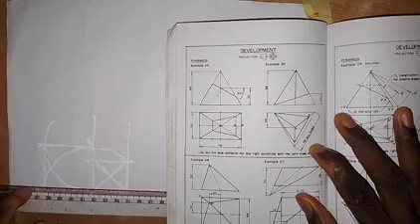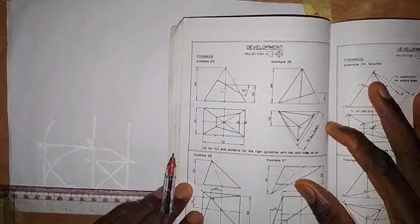This problem has to do with a triangular pyramid, the surface development of a triangular pyramid. This pyramid is a truncated one, in the sense that it's cut, this part is cut off, and these views are given in first angle orthographic projection. It means that this is the front elevation and this is the plan, as you can see here.

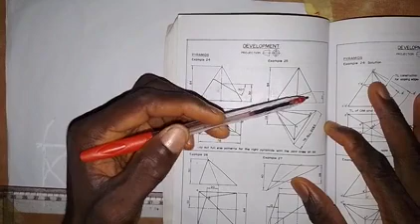Let's talk about the dimensions on these views. For the front elevation, the distance from here to the apex is 64, and the distance from this base to this point where the cutting starts down here is 20 millimeters.

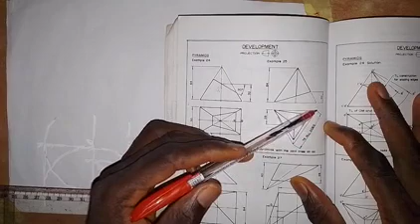Coming to the plan, we have that the length of side of the triangular base of the pyramid is 76 millimeters, that is all sides. So distance from here to here is 76, from here to here is 76, and from here to here is 76. Then the distance between this center point from this horizontal line is 28 millimeters.

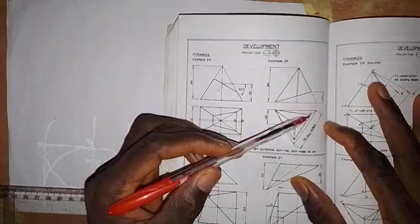And then the seam, so where we are to open from, is this AA that we have here, is a joint line, that is the seam.

So we are going to make use of these dimensions to produce the front elevation and also the plan. Then we go on and produce the surface development of this triangular pyramid. So let us start. The first thing that we are going to do is construct the plan.

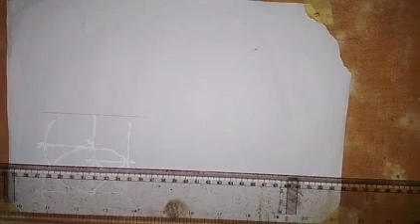I'm going to construct the plan, and to do that, I first draw a horizontal line around here. Then, drawing this horizontal line, I'm going to take a measurement. I'm going to draw a vertical line first, around this part here.

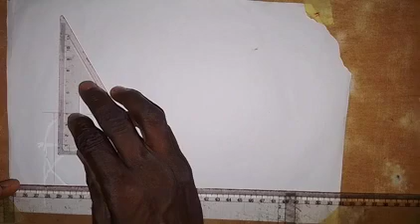Drawing this vertical line down, I will take a measurement of 28 millimeters from this point on the line. So this is 28 millimeters here.

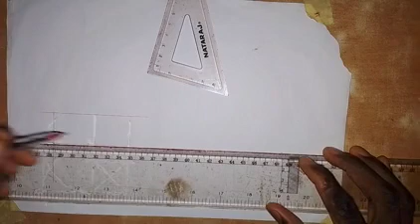With this 28 millimeters, I have to be checking the work. So I'm going to draw a horizontal line like this. Then, with this horizontal line that I've drawn...

The next thing I'm going to do is take a measurement of 76 millimeters on this line, 76 millimeters on this line, and 76 millimeters on this line. This is 76 millimeters, 76 millimeters, and half of 76 is 38.

That's 38 millimeters. This is where we have 38 millimeters.

So I'm going to draw a vertical line here, down. It's really a technical work, so we need to take our time to analyze it. We draw a vertical line down here.

Then I'm going to connect this point. This point that we have here is point A. So we have point A at this point.

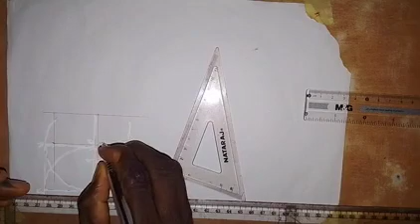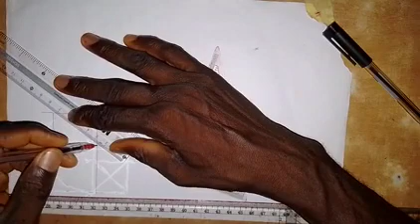So I'm going to connect this point together with this point. We connect these 2 points together like this. So this line that I drew is the line that we have here.

So this is the line, this vertical line that we have here, that is the line that we have there. So that's the vertical line. Then we have gotten this line from here to here, from this point A to this end.

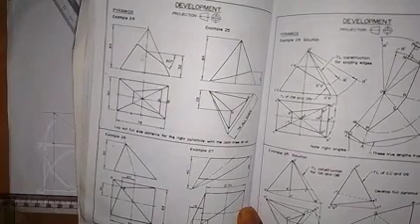So the next thing we are going to get, looking at what we have here - I believe you know that this shape that we have down here is an equilateral triangle. All sides are equal, as we are told that 76 all sides.

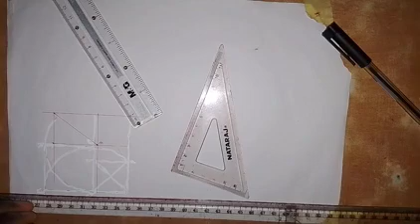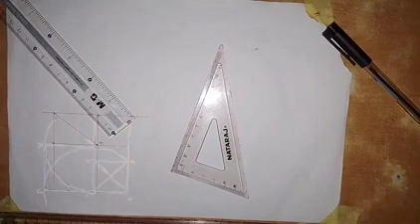So it's an equilateral triangle, which means from this point, if I take a measurement... we have taken 76 from here to here, 76 millimeters from here to here. So that is one of the sides.

So the other side, this is what I'm going to do. That means I need to make use of my set square, my compass. So I will take a measurement of 76 millimeters from here.

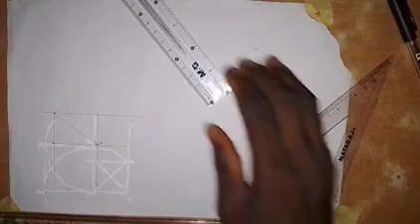76 millimeters from here, then I will put at this point, and then I will make an arc on this line. So the distance from this point to this point will be 76 if you take the measurement. So this is it.

Okay, so as we have it here, this is 76 millimeters. If you look at it well, it's 76 millimeters. So if I drop from here to here, I have that 76 millimeters. Then if I join from this point to this point, I will have that same 76 millimeters as given.

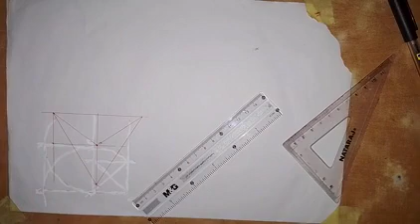So I will now join this point, connecting this point together with this point like this. But with what we have here, we are not done. We have not drawn the plan of the truncated triangular pyramid, because a part of it is truncated, which we need to show in the plan.

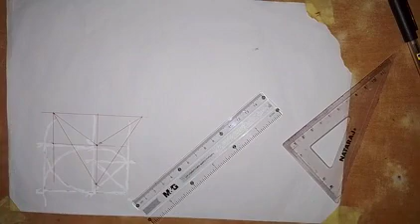So we are going to work that out right now. What we need to do now is go and produce the front elevation of the triangular pyramid.

So what I'm going to do here is extend this vertical line, taking it up here. Then I move up a little bit and draw a horizontal line. From this point, I'm going to draw a vertical line to meet this line, and here also I will draw a vertical line to meet this line.

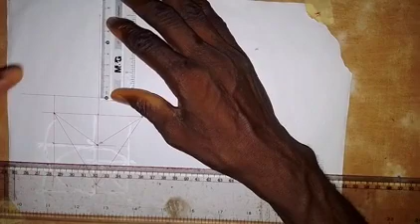Then I will take a measurement of 64 millimeters, which is the height of the triangular pyramid. So this is 64 millimeters, which means I will now connect this point together with the apex, and also connect this other point together with the apex like this.

Okay, so the next thing we are going to do is take the measurement of the truncated part, which is 20 millimeters from the base here. So I will take a measurement of 20 millimeters on this line. This is 20 millimeters.

So I need to locate this point on this slant side here, so I'll just mark it here like this. Then as we have in the drawing, this point is connected to this point like this. So this part is cut off, so we make it a thick line at once like this.

So now, this is a corner, which means this line should be drawn with a thick line. And also this line should be drawn with a thick line, so we make this a thick line. This is also a corner, so we need to make this a thick line too.

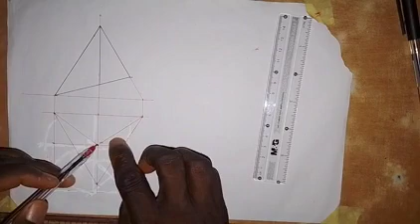So when this part is cut off, it means this line will be shortened, and also this line will be shortened aside this one. This one is just complete because the cutting plane only cuts this part off, so it will only affect the distance along this line, and also the one along this line based on what we have here.

But what I'm going to do is label it according to the way it's labeled in the drawing. So this point is O1, this is A1, this point is S1, this point is C1, this point is B1, and this point is R1, as we have here.

So now let's get this part that is cut off, on this line. By the time I set my set square at this point, if I draw a vertical line down here, it meets this point. So this point that we have here, I call point R2.

And this point that we have here, I'm going to call it point O2, that is this point here. And also this point is point A2, and then we need to locate point S and point C. So this is point C2, while this point is point B2.

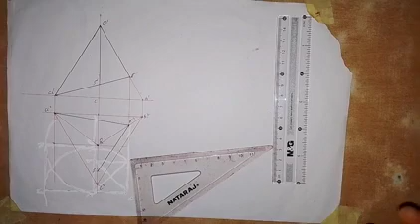If it is not truncated, but since it is truncated, we have to cut off the part that is cut off in the front elevation. So that's what I'm doing now. Also, I'm going to connect this point.

S2 A2 will be connected together like this. So then these lines, these are the edges that we have left for this particular truncated triangular pyramid. We make this line a thick line, and also this line from here to here a thick line.

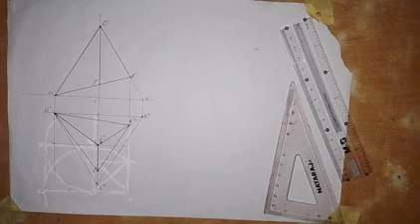So now, what we have left is to go on and produce the surface development. But before we do that, we need to find the true length, because these sides have been shortened, so we need to find the true length. That's what we are going to do next.

So now, to find the true length, we are going to find it for two parts here: the true length of OA and OB, and also the true length of OC. Just look at how I'm going to do it.

The first thing I'm going to do is extend this line. I don't know how long it should be, but I'll just extend it like this. Then, coming to the center here, I will also extend this line. Now I will take my compass and put it at point O here, and extend it to B.

Look at this horizontal line, it contains both A2 and B2, so I can only make use of one of them. If I put the midpoint of my compass at point O2 here and extend to B2, I need to turn it down like this. Wherever it meets this horizontal line, I'm going to draw a vertical line up to meet this line.

So then I'm going to connect this point here with point O1 here, like this. So this true length that we have here is the true length for OA and OB.

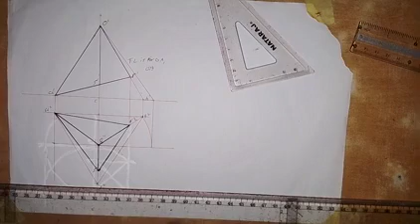Then to get that of OC, I will still put the pinpoint of my compass along this line and extend it to point C. So you can see that to draw the true length and get this point OC, I have to compress this compass, meaning the distance from here to here is not the same as the distance from here to here. So that is what we are doing.

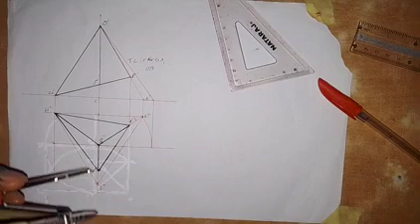By the time I extend it to this point here, that is point C2. So I will draw an arc like this, and it made this point. From this point now, I'm going to draw a vertical line, and I think it made this point, this line OS at this point.

Sorry, so it made this line OB, which means that this is the true length of OC. So this is the true length of OC, and it's also the same as the true length of OB. So let's take note of that.

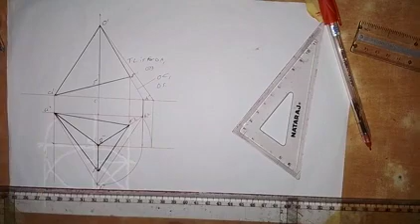Okay, so now the next thing that we are going to do is to carry out the surface development using the true length. All right, let's look at how the surface development will go.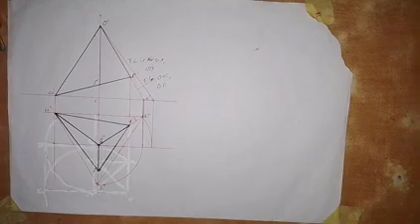At this point, I'm going to draw a horizontal line. From this point, I will draw a horizontal line like this. Okay, so this point is going to be my point O for the surface development.

So now I will take my compass and take the longest true length, which is this line, the true length of OA and OB. So I put the point of my compass here at point O, then I'm going to draw an arc like this. I pray that this will be enough.

I'm not sure if it will be enough for the work that I want to do, but let me see how I'm going to get it done. So now, what we need to do is take this point, which is point B. So what's next is to locate point R, because we are opening it.

This is where we have the seam, so we are cutting it from here. I take the distance to locate this point R here. I will take this distance, then put it at point O, then I will make an arc here. So this point is point R.

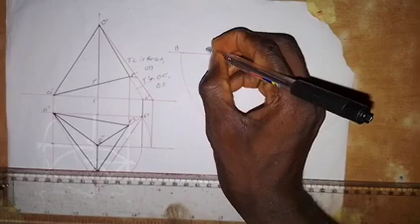So this is point R. So the next thing that I'm going to do is to locate point A. So how can I do that?

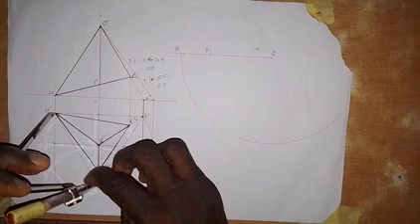What I need to do is take a measurement of this, 76 millimeters. I'll take it here like this from the base, and then putting it at this point, I will make an arc here like this. So with this arc that I made at this point, we are using the length of the base. Very, very important, we have to use it.

This is where we have point A, so we have to use the length of the base to locate this point. And then I will join this together, from here to here like this.

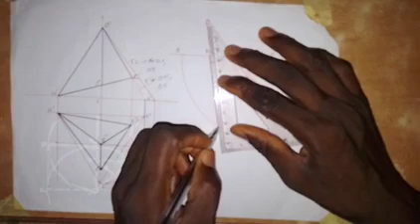So then the next thing that I'm going to do is to locate point S. We need to locate point S here. So how can we locate point S? This point S is what we need. We don't need point C. So it's on C that we have what?

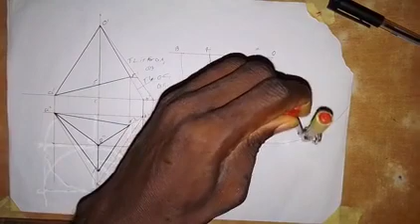Okay, I can even locate point C if I want to. So with the same 76, I'll just put it at this point and make an arc here. So this is point C here.

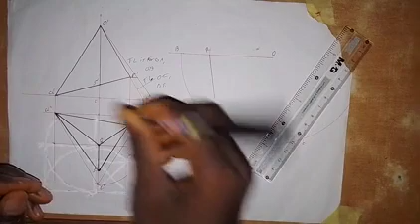But on this point C, I need to connect point O, A together. So this is point A, sorry. So I need to connect OA together. So if I connect OA together like this, so this is OA. So connect this OA together, and I'll also connect OC together like this.

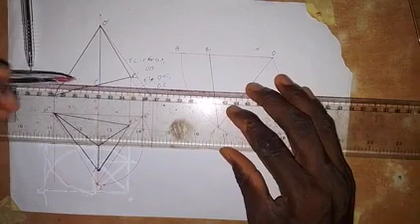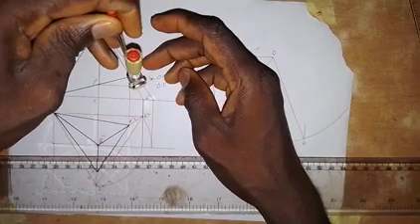Then on this OC, I need to find point S. To get point S, what I need to do is draw a horizontal line from this point to the true length here. That is the true length, this one, that's what we are using. So I just take my compass from point O to this point here, taking this distance, and put it at point O, and I will make an arc on this line. So this is point S here.

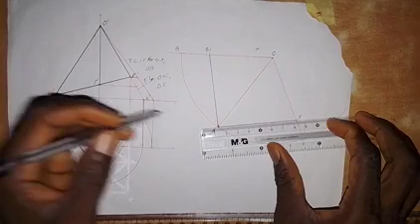So this is point S. So I will join this together, that is AS, connect them together. As you can see here that A is connected with S. So we connect these together like this.

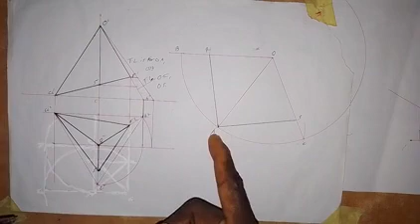So next thing I'm going to do is to locate point B, which is this point here. Don't forget that this arc we have here, we use the true length of OB to draw, which is also the same as that of OA. So to get that, I still need this 76 millimeters. Let me just take it along this line here like this, then putting it at this point C here, I will make an arc here.

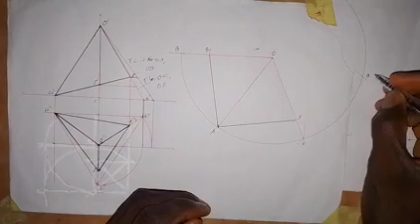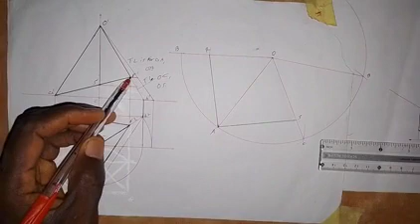Alright, so that's OB. Then the next one that we are going to locate is point R, which is this point, because S is connected with point R here. As we have here, S is connected with point R, we also have it in the front elevation.

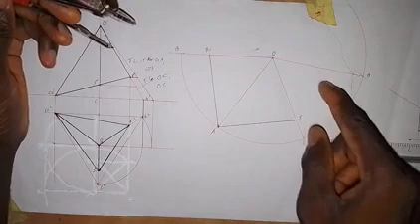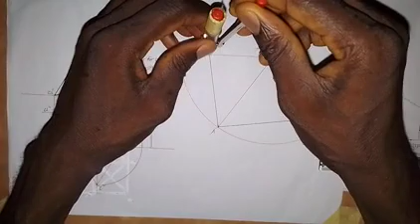So all I need to do is, let me take it from here. Putting the pinpoint of our compass at O here, I will extend it to R here, so I'll just cut it here, making an arc here on line OB. Then we are connecting these together, RS together. So this is point R. So we connect RS together.

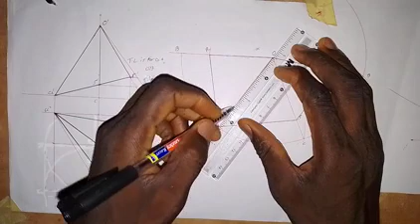So all I need to do now is make this line a thick line, and this line a thick line. I'm going to leave this one like this because they are fold lines, or I can just make it with a line like this. So they are fold lines, so we are not going to make them thick lines. These are known as fold lines.

Okay, so this is how the surface development will look, as simple as I've done it here. All you need to do is to practice. When you practice it, you become a master at it. Thank you, and God bless you.